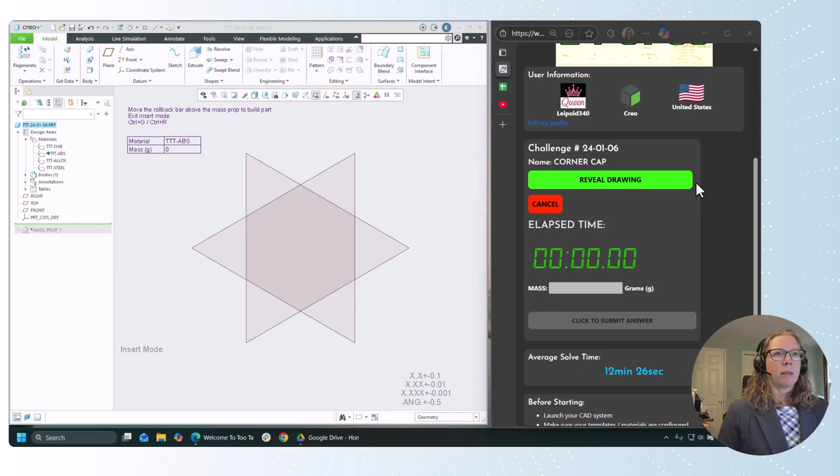All right, so this is number 6, 240106. It's the corner cap, and we are ready to go. It is asking for grams. We have a metric template open, and let's get started.

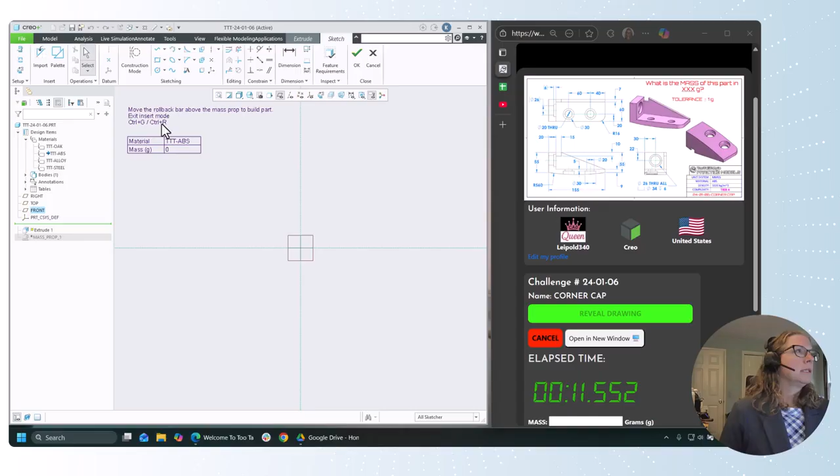All right, let's start with an extrude on the back, and let's drop an arc on there.

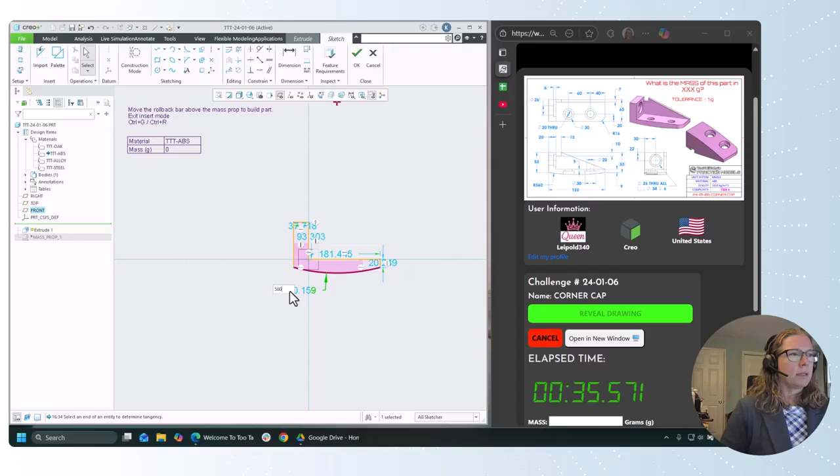So I don't know if you saw that little green thing. It's kind of an interesting way to add arcs: if you come straight out, it'll give you a tangent arc, and if you go to the side, it'll give you a not tangent arc, sorry.

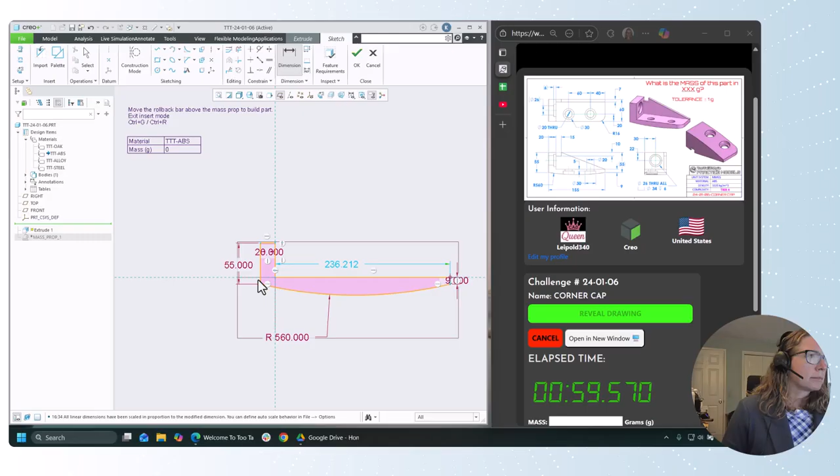All right, I think that's it. We're going to extrude that, and that's going to have a depth of 60.

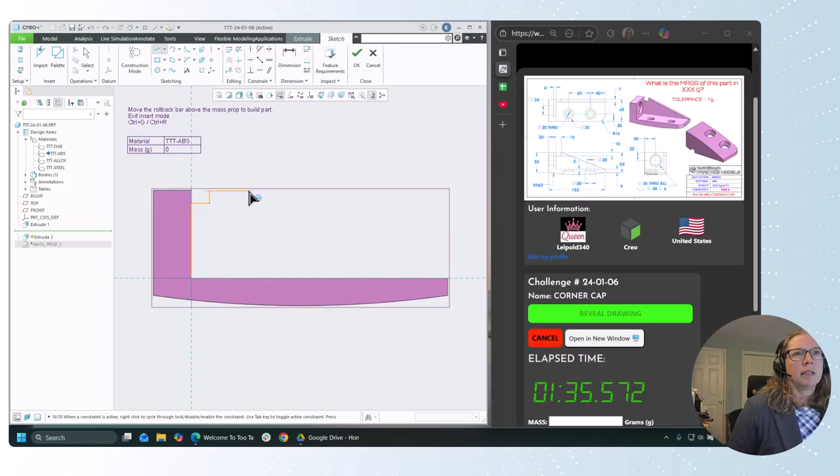And on that same sketch, we'll make another sketch. All right, I think I'm going to have to adjust that. I don't think that constraint stuck. That's all right, let's see here.

This has a depth of 10. Yeah, that's what I thought. This one's 15, and these are going to be horizontal.

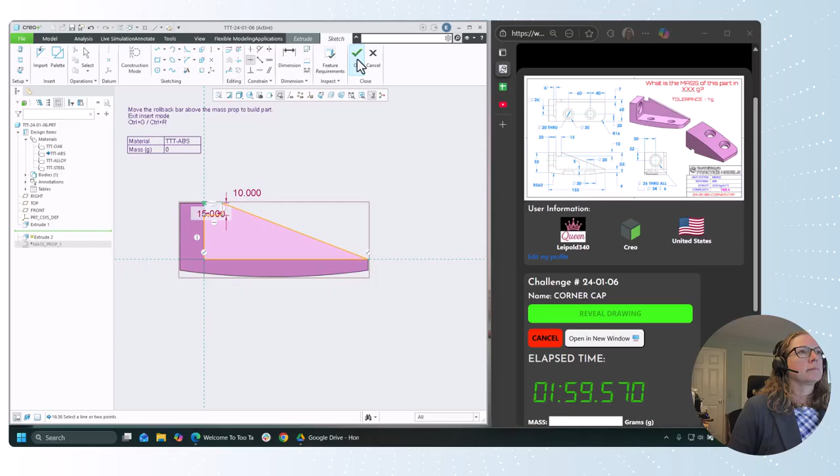And that gets an extruded depth of 7. Just check and make sure it's going the right direction. There we go.

All right, and for these holes, what I'm going to do is use that sketch region option. So I'm going to sketch, and I'm going to have to add that round, but I'm going to put a circle

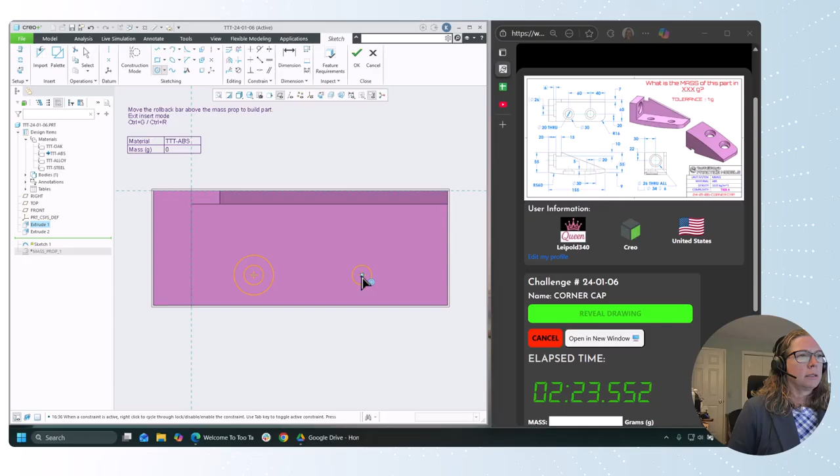and a circle. All right, we've got the inner hole is 20, outer hole is 30. The distance between them is not shown here. All of the dimensions are wrong. That's all right, we can fix it.

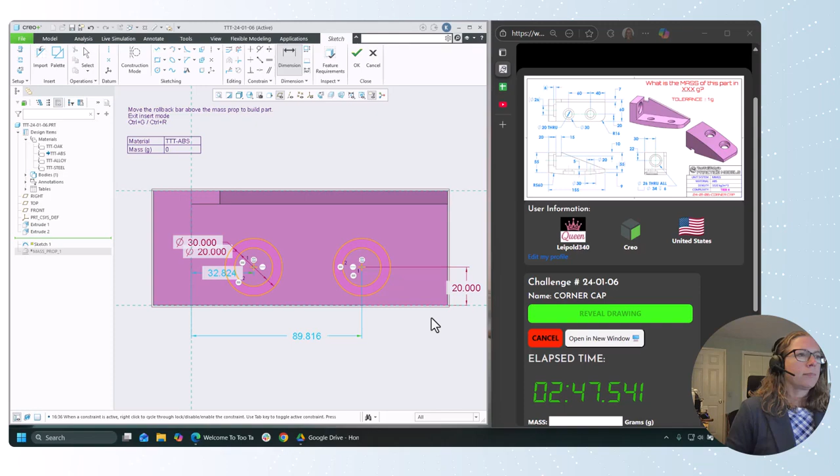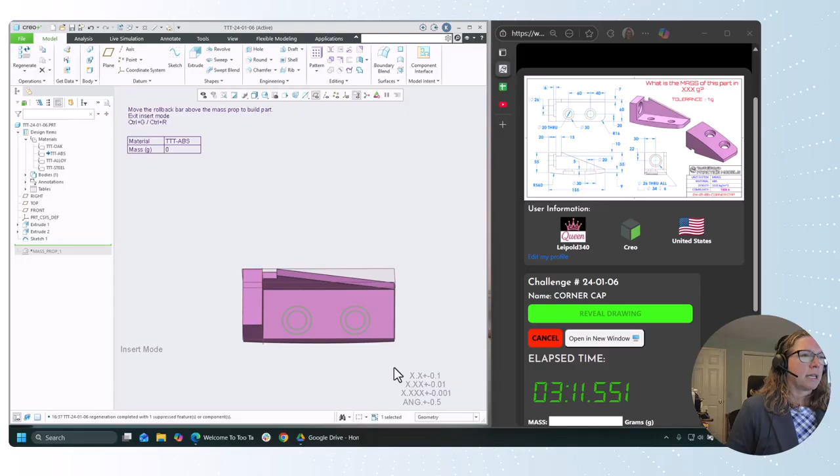I've noticed that my home mouse tends to not select things as well as my school mouse, so I need to be extra careful when I'm clicking on some of those corners, making sure they're being selected when I'm trying to add a dimension.

All right, I believe that was the only round. Okay, got the 20 and 30.

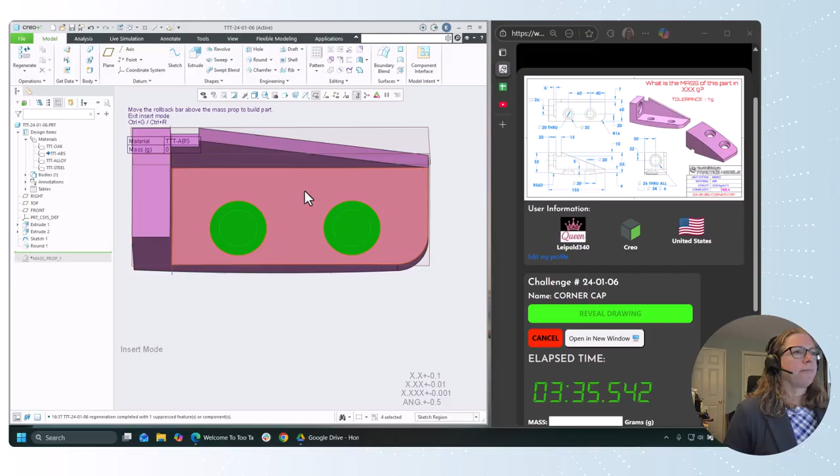So what I'm going to do is I'm going to use sketch regions, and I'm going to get all of these shapes here extruded the other direction.

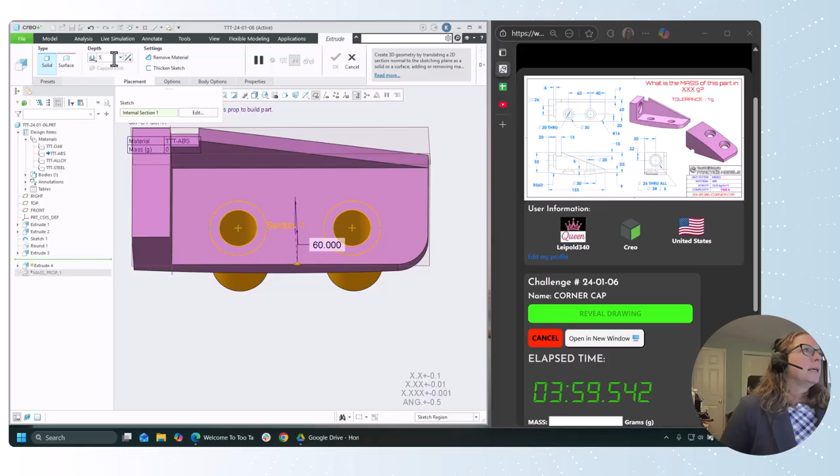And then with the sketch region, I'm going to add this section back in. The reason I'm doing that is because the counterbore is coming up from the rounded surface, so I'm doing that to kind of get that counterbore shape there.

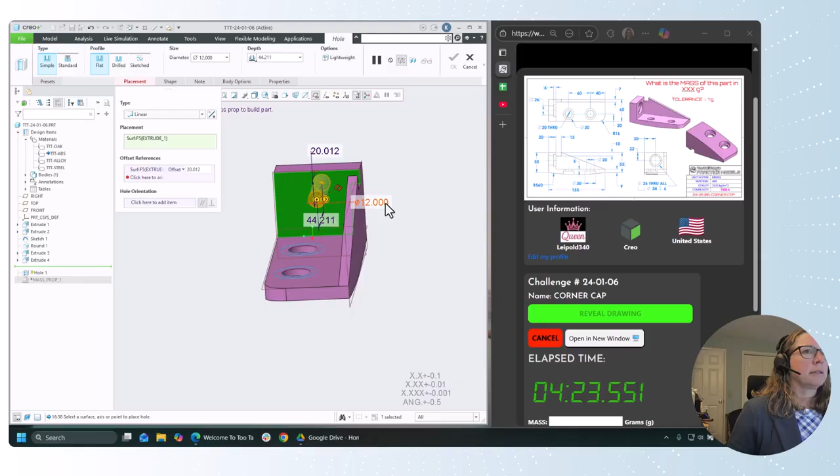All right, this one would be easier to do, but we'll just, actually we'll do it as a hole, and we'll place that 22 down and 30 from the left.

And give it a counterbore. The through hole is 26, and the counterbore is 34, with a depth of 6.

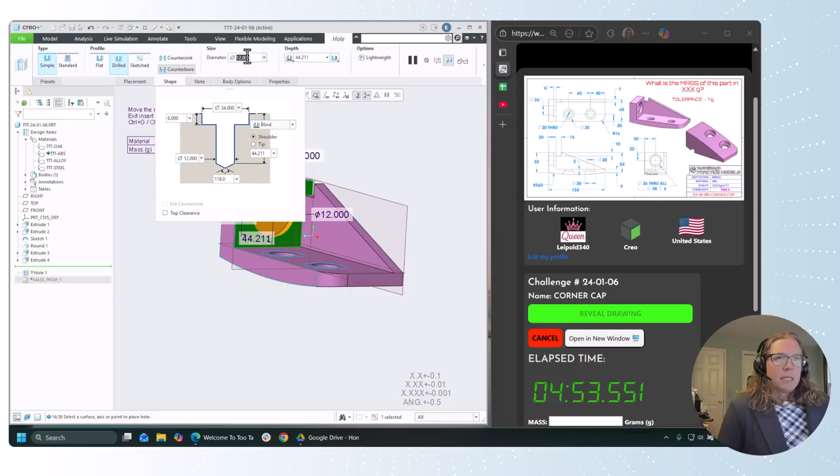Hopefully I can set my diameter to 26 now. Make it go all the way through. And so that linear option means I don't have to make that sketch. Everything's looking pretty good there.

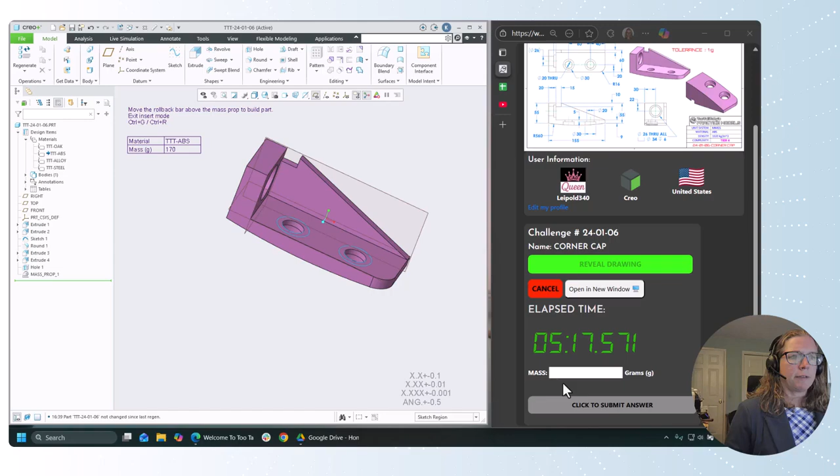All right, let's see how we did. Let's try 170. Nailed it. Oh, so close to my previous time. So close. All right.

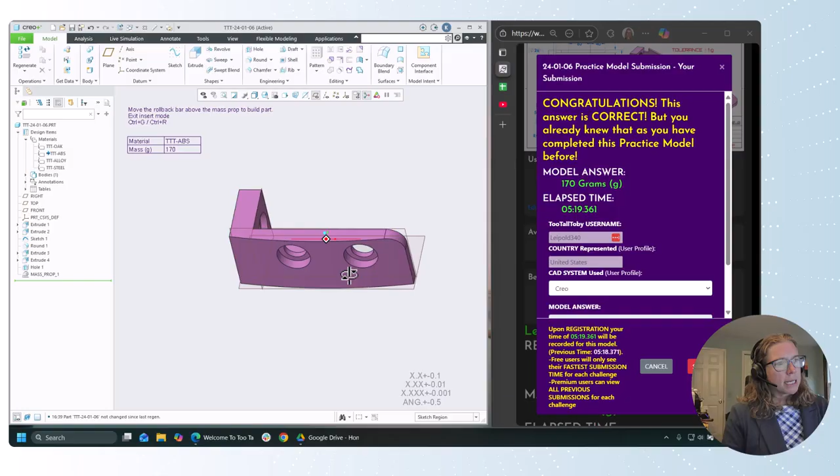So let's see, anything fun there? We took advantage of the linear hole placement, so we didn't have to create the sketch. We used sketch regions because the counterbore was on the far side. All right, I think we're good to go. Thanks.